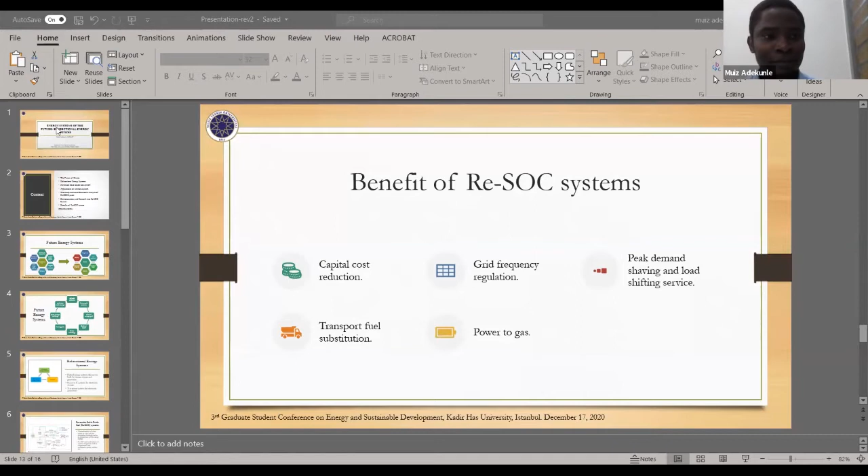Okay, thank you. Sorry, I was on mute. I am Muiz Adekunle Agbaje from the Department of Mechanical Engineering, Yıldız Technical University, Istanbul. I'll be talking on the energy systems of the future, with specific reference to bidirectional energy systems.

In this presentation, I'll be talking on the future of energy. I'll be giving an insight on bidirectional energy systems. I'll be talking on the reversible solid oxide cell system as an example of a bidirectional energy system, the applications of this system, the aspects of the thermodynamic and economic analysis of the reversible solid oxide cell system, some demonstrations that have been made and used, and some research that has been done in terms of reversible solid oxide cell systems, the benefits of the system, and finally, I'll conclude on this discussion.

So when we talk about future energy systems, we are talking about systems that are characterized by so many things that we want as part of our energy in the future, how we want energy to look like in the future, the energy ecosystem, what do we want it to look like. We talk about demand side management, net zero energy systems, renewable energy systems like solar and wind. We talk about increased energy efficiency. We talk about green energy in terms of CO2 emission reduction. We talk of so many things that characterize these systems, and these characteristics will result in systems with high integrity, high security of supply, less expensive systems, and the like.

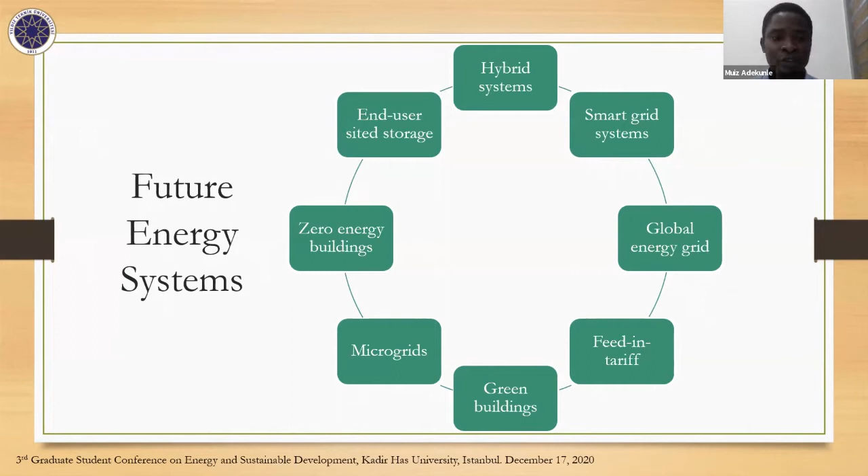Now, talking about hybrid energy systems, an example is the bidirectional energy system that I will be talking about here today. A bidirectional system is a system that serves for both energy storage and energy generation. I should note here that a bidirectional energy system has to be one system that functions both as a storage system and a generation system as a whole, not a storage system that has generation incorporated to it. That is not a bidirectional system.

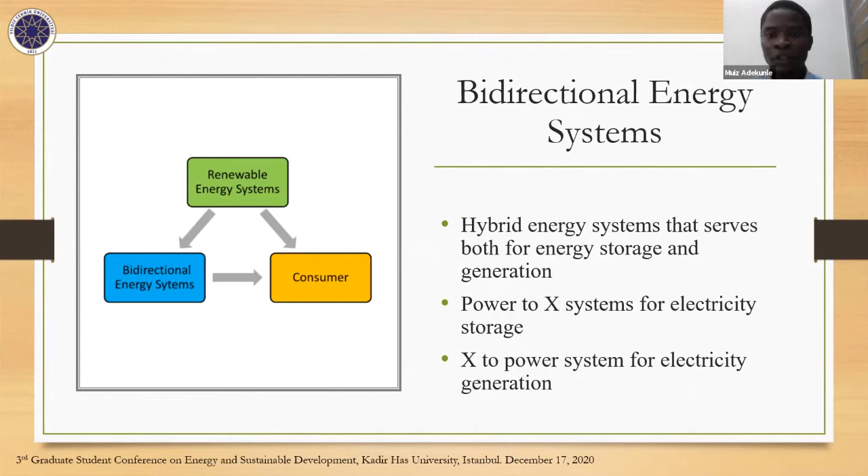So these systems are characterized by power to X or X to power. Here, X could be hydrogen or heat, depending on how the system is configured. An example of this system is the reversible solid oxide cell system that I will be talking about here today. A reversible solid oxide cell system is an electrochemical cell system that functions as a fuel cell for electricity or power generation, and as an electrolyzer cell for energy storage.

This system, being a system, has to contain at least two components. So for the reversible solid oxide cell system, it has other components such as heat exchangers, heaters, compressors, and turbines, depending on how the system is configured and the size of the system. We call these the balance of plant components. They are used to set the temperature and pressure of the gas, the exhaust, and the flow gases in the system, to set the system performance and system characteristics.

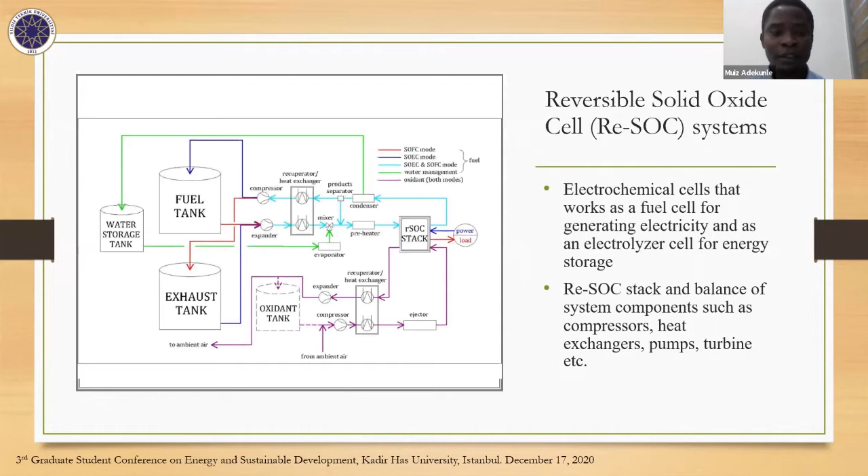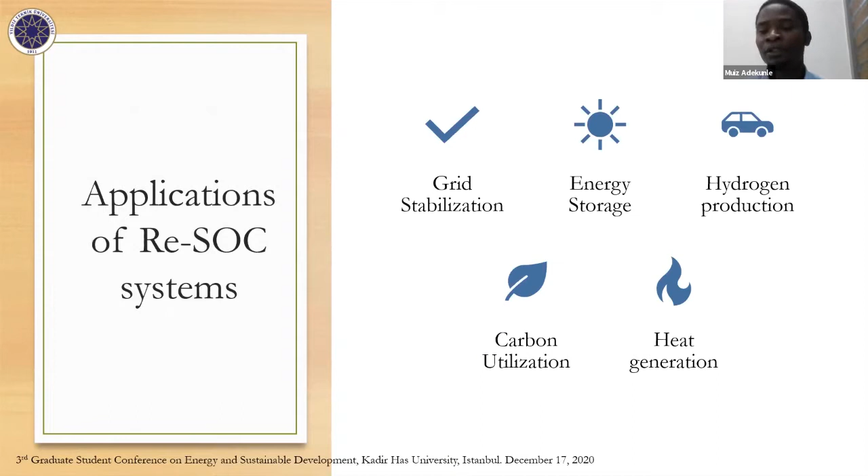So these systems could be applied for grid stabilization. They could be used purely for energy storage. They could be used for hydrogen production when the system works with steam. They could be used for carbon utilization, where they could generate synthetic natural gas, or be used to store electricity in the form of syngas. And also they could be used for heat generation, because reversible solid oxide cell systems, or solid oxide cell systems in general, work at very high temperatures, from above 500 degrees centigrade up to 1000 degrees centigrade. So the aspect of heat generation and thermal management, among others, is important in the system.

So in the aspect of thermodynamic analysis, we talk about the heating value of hydrogen or the synthetic natural gas generated from the system when it is operating in storage mode. We talk about the power generation or heat generation and consumption in the system. We talk about the round trip efficiency of the system, which is the ratio of the power generated to the power stored in the system. We talk about the storage size, which is usually the size of the tank used for storing the fuel, probably the hydrogen or the natural gas, depending on the fuel used in the system.

We talk about the fuel utilization of the system, because it's a system that works on cell stacks, as I'll explain further. So the amount of fuel supplied to the system is not usually the total consumed, just like we have in chemical reactions. So the fuel utilization ratio is actually very important in the thermodynamic analysis of the system.

We talk about the cell degradation rate per cycle. As I said earlier, the reversible solid oxide cell system works at relatively very high temperature, which causes degradation in the cell. So the rate of degradation per cycle is also important in characterizing the cell and the system as a whole, to determine the lifetime, the efficiency, among others.

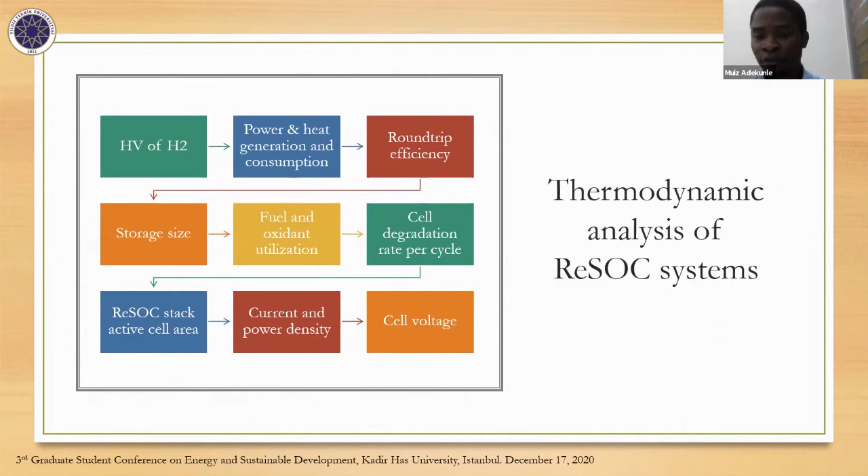Also, the active cell area, the current and power density, which is the ratio of the current or power generated or stored by the system to the active cell area. And of course, we have the cell voltage of each individual cell, which amounts to the total stack voltage in the reversible solid oxide cell system.

In the aspect of economic analysis, we talk of the capital cost associated with the stack of the system, because the other balance of plant components are actually mature technologies, so their prices could be predicted or asked from vendors during the economic analysis. However, the capital cost of the stack is not, there isn't enough data to predict the cost of the stack. So the capital cost of the stack is very important, as it takes a large amount of the total cost of the system.

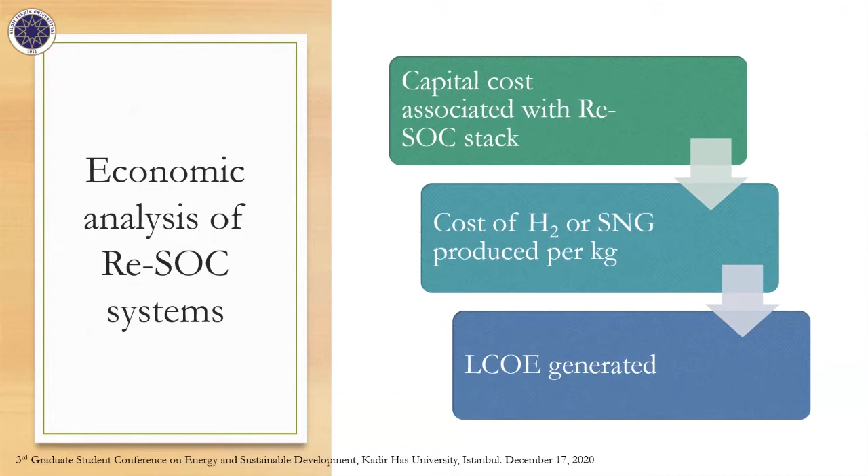The cost of producing hydrogen or synthetic natural gas, depending on the operating fuel of the system. When I talk about operating fuel here, I'm talking of either steam or carbonaceous gases such as carbon dioxide or the like, depending on how we choose to operate the system. The cost of producing these gases is also important in the economic analysis of the system, because we have to achieve a beneficial cost of producing this hydrogen or syngas. Otherwise, no matter how efficient the system is, if the cost of producing this gas is not competitive with what is available in the market, it's just another waste of technology.

Also, the levelized cost of electricity generation. The cost of hydrogen and synthetic natural gas applies during the storage mode of the system, when we talk about hydrogen or synthetic natural gas production. During the generation mode, electricity is generated, and the levelized cost of this electricity is very important. If we do not take cognizance of this cost, and it's not on par with what's available from other systems such as pumped hydroelectricity, it is just as good as not having a system, because nobody would want to pay more for a system, no matter how good or interesting it seems.

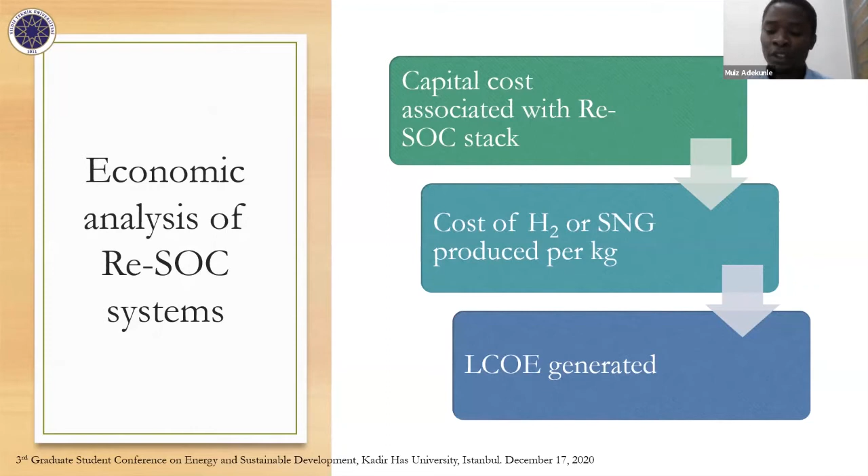So now going to the system as a whole, the demonstrations that have been carried out - we've had experimental demonstrations and, of course, the computational modeling of these systems.

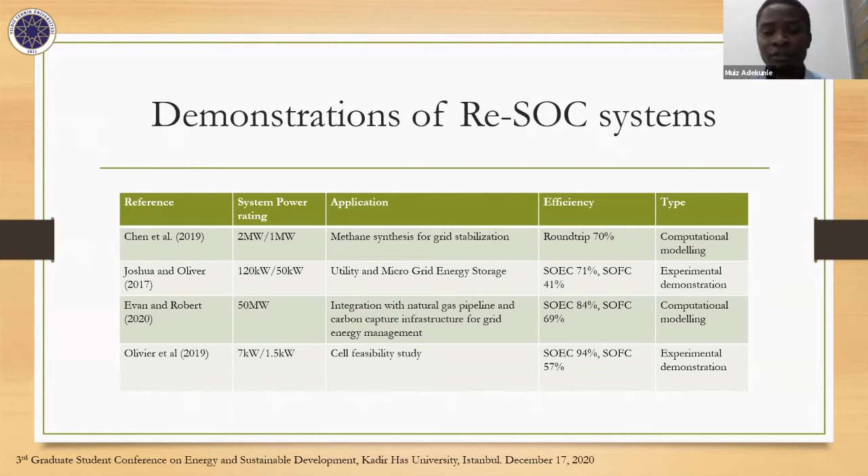Also, this feasibility study was carried out earlier to show the feasibility of operating a fuel cell both as an electrolysis cell and as a fuel cell - practically the reversible operation of the solid oxide cell system and a solid oxide cell stack in this situation. It's a stack, not the whole system, just a stack. A 10-cell stack was tested in this operation, and it showed very good performance both as a fuel cell and as an electrolysis cell.

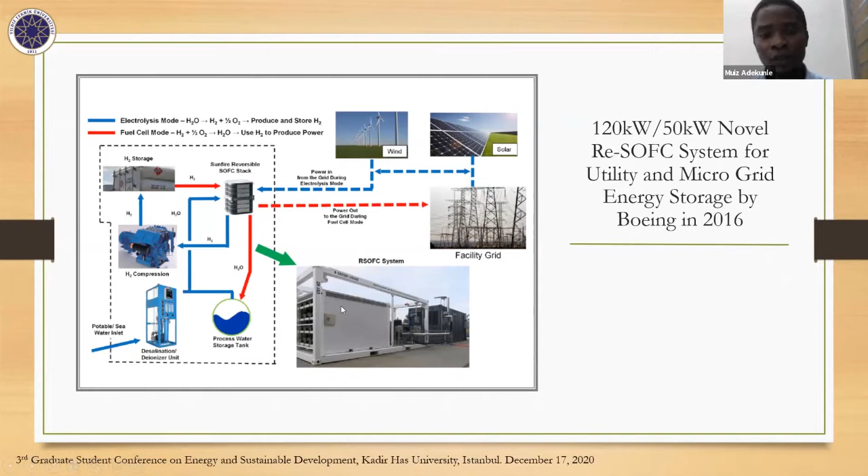As I said earlier, this 120 kilowatt by 50 kilowatt system that was incorporated into a grid is explained here. We have the solid oxide cell stack here, and the electricity was generated from solar, wind, and the grid, and supplied to this stack, which has the hydrogen storage, hydrogen compression system, the desalinizer, and the deionizer unit for the water used, because water was used here to generate hydrogen. This is the whole system, which showed very good efficiency, as I explained earlier.

So, further research for anyone interested - I selected these two studies because they are very detailed in terms of the work that was done. This 2015 study...

Yes, this design was carried out for the engineering design of the reversible solid oxide cell, the performance analysis, and the operating condition selection, among others. This 2015 study and a 2017 study showed the feasibility of this with respect to spot electricity and fuel market for a 2050 target of Denmark. And this 2019 study showed the integration of this solid oxide cell system into the natural gas pipeline of Alberta, Canada.

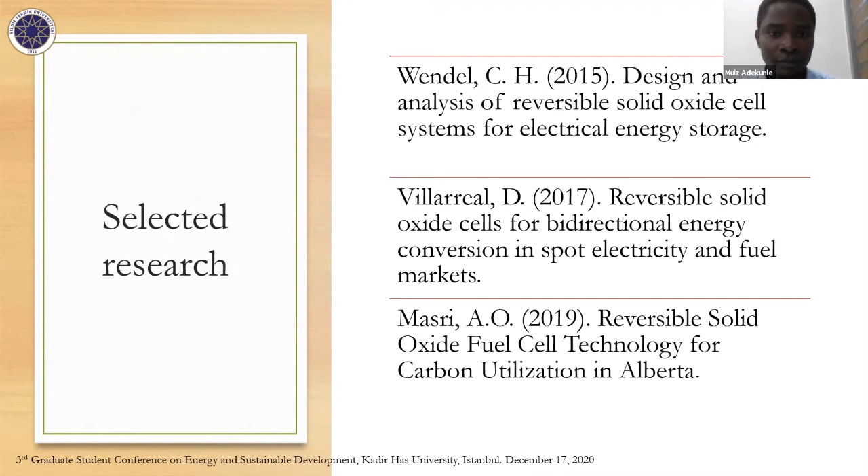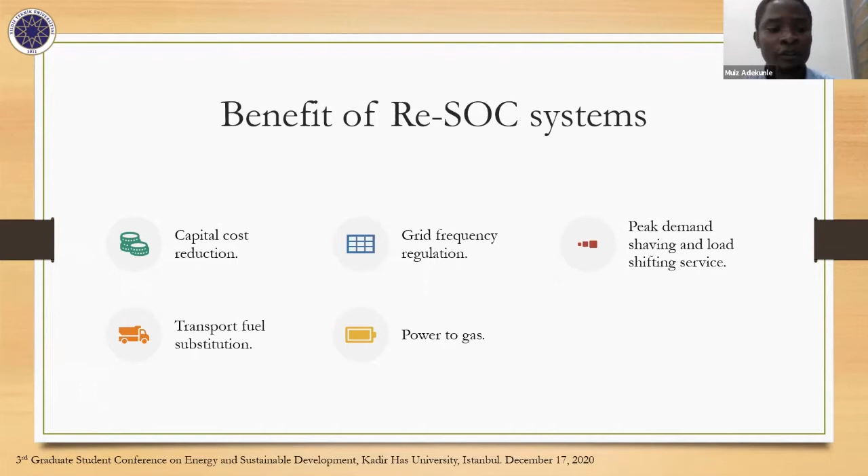The benefit of this system, as I said, is that it's one system that functions as two. So there is up to almost half capital cost reduction, and it can be used for grid frequency regulation, peak demand shaving, and load shifting services. It could also be used to generate hydrogen for transport fuel, and of course, for power-to-gas applications.

This figure is from IRENA in 2018, showing a hydrogen economy. It shows how a reversible solid oxide cell system can be integrated into a hydrogen economy, where electricity is converted to hydrogen and used in different applications, as you can see in the picture.

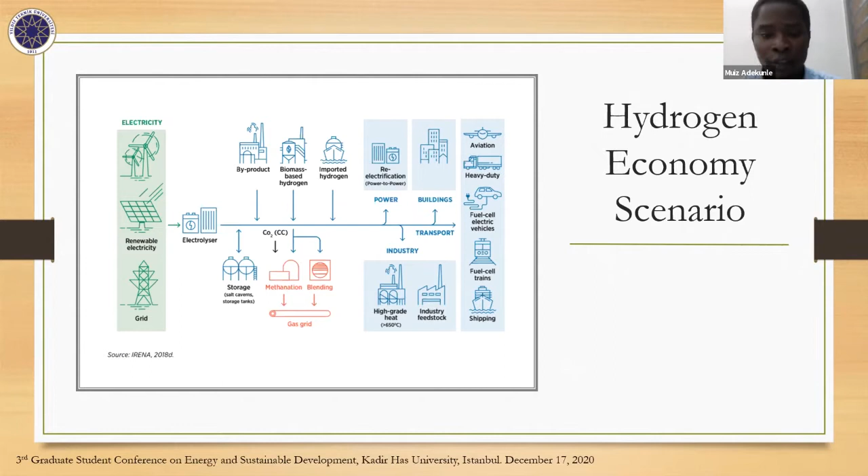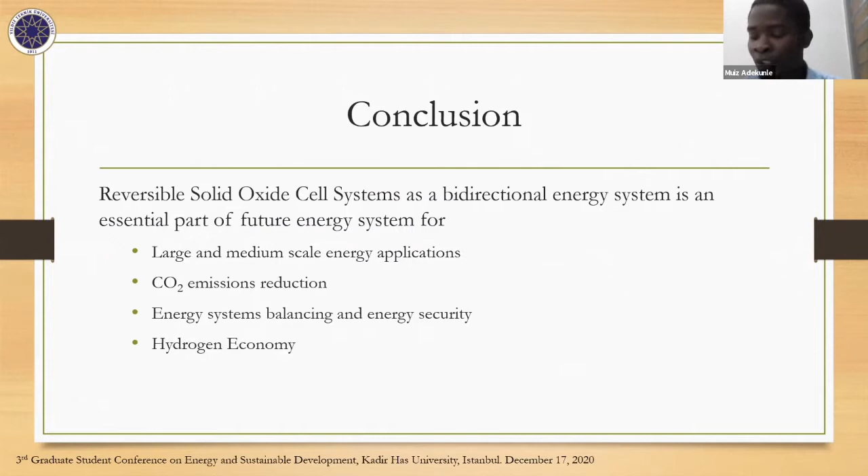In conclusion, I'd like to say that the reversible solid oxide cell system, as a bidirectional energy system, is an essential part of the future energy system for large and medium scale energy applications. It can be used for carbon dioxide emissions reduction, for energy system balancing and energy security, and also in a hydrogen economy. Thank you for listening.

Any burning questions, if there are? No? Well, I can ask one if you want.

Muiz, so what is this, your master thesis? Yes. And how will it progress? Will you have a small experimental setup, or will you do some simulations, or is it just, for the moment, a literature survey? Due to cost restrictions, I will just be doing a simulation. Actually, I have the system that I've already designed and simulated. I have it already, so I'm presently carrying out economic analysis on the system.

So it will be essentially a kind of simulation. Yes. Okay, any other questions? Muiz, let me ask this: have you made any search about the capital cost of building this structure and the operational cost? Because that is also important, you know.

Yes, of course. In terms of capital cost, for the reversible solid oxide cell system, I am presently using the cost of the solid oxide fuel cell, because we believe it is the same fuel cell that will be used as an electrolysis cell, so the same cost analysis goes. We have historical cost data for solid oxide fuel cell systems, just the fuel cell stack, so that is what I'm using to simulate the cost of the cell stack.

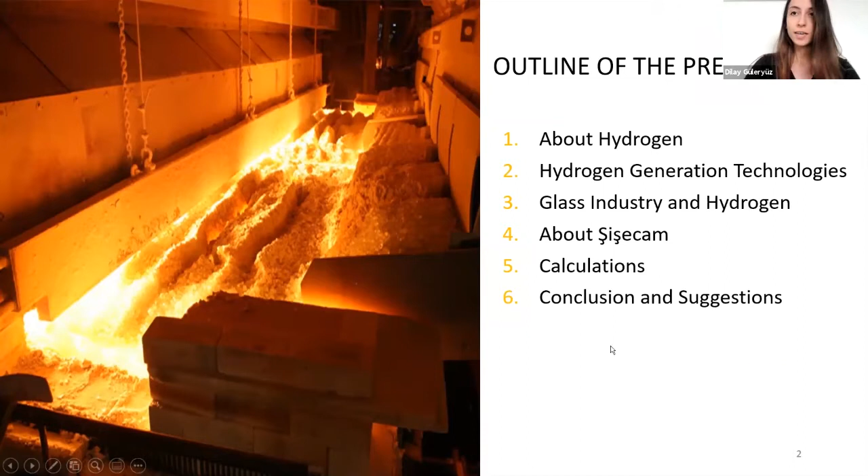So here's the outline of the presentation. We will first talk a bit about hydrogen and hydrogen generation technologies, and then a brief introduction to the connection between glass industry and hydrogen will be made. This will bring us to the biggest glass manufacturer of Turkey, Şişecam. Lastly, I will present the analysis and findings of green hydrogen generation potential for several Şişecam plants in Turkey. And then we will shortly conclude all of them.

Now let's start. We do know hydrogen. It's in water, it's in organic substances, it's basically everywhere. And in fact, hydrogen may be the most abundant substance in the universe. Realizing its potential, Jules Verne once referred to water and hydrogen as the future coal in one of his books.

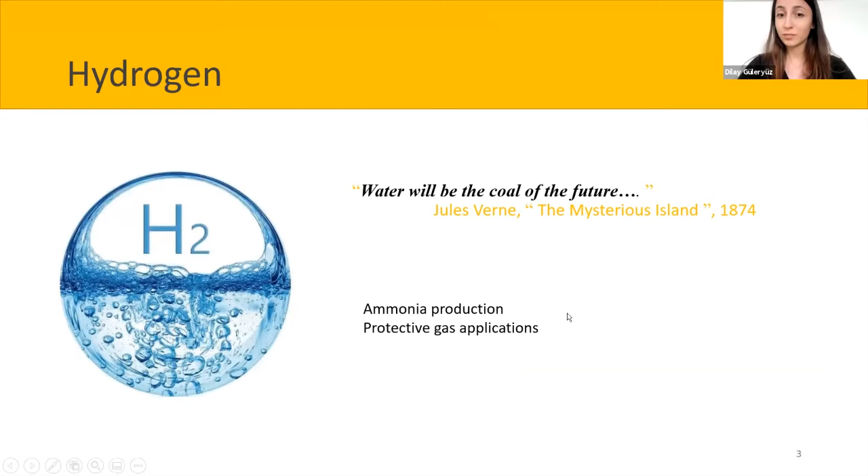So if there's that much amount of hydrogen, we should be using it somewhere in the industry. In fact, hydrogen has a wide range of applications, from ammonia production, protective gas applications, and energy applications, to decarbonizing carbon-intensive industries such as iron and steel, cement, or glass. In this presentation, we are interested in this kind of application of hydrogen.

So in order to decrease carbon dioxide emissions and start a transition to green hydrogen, hydrogen-intensive industries may be a good start, and as being said, glass industry is one of them. So in order to understand how to decarbonize a sector by hydrogen, let us first cover hydrogen generation technologies.

These techniques can be divided into three by using a simple color code and based on their carbon dioxide emissions. Firstly, gray hydrogen. Gray hydrogen refers to hydrogen generation from fossil fuels. Oil, coal, or commonly natural gas can be used as the source in this kind of application. The costs are low, and in fact it's the cheapest way to produce hydrogen. However, carbon dioxide emissions are very high.

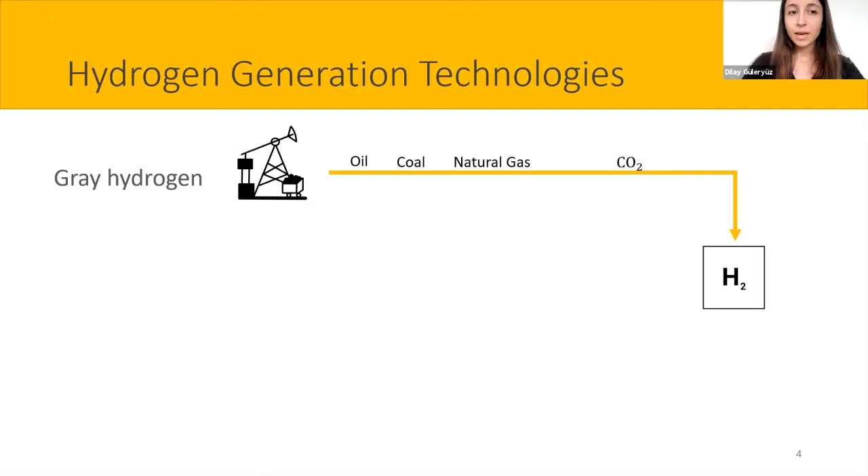The second one is blue hydrogen. Blue hydrogen is an interesting concept. Here again, fossil fuels are used as the source, but a carbon capture and storage technology is implemented into the system to reduce the carbon dioxide emissions. This technique is not very popular considering the costs of carbon capture and storage technologies and the taxes.

And lastly, green hydrogen comes, and in these applications, decarbonized electricity is fed into a water electrolyzer to produce hydrogen. The decarbonized electricity comes from renewable sources, such as wind, solar, or hydroelectricity, or other renewable sources you can imagine. The costs of using renewable sources decrease every day by developing technologies, and therefore water electrolyzers are gaining more attention. The electrolyzers can be alkaline or polymer electrolyte membrane, namely PEM electrolyzers.

PEM electrolyzers are quicker to respond to changing electricity. Therefore, they are preferable with renewable energy sources. However, their costs are higher than alkaline electrolyzers.

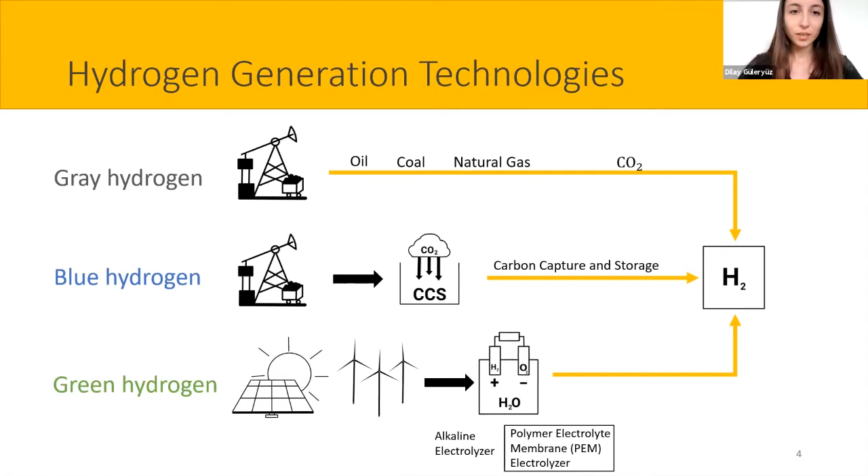Now we will briefly talk about the role of hydrogen in the glass industry. Hydrogen is employed in flat glass production, and here you see a production line of float glass. The raw mixture consisting of quartz sand, dolomites, soda, and lime is melted and floated into a tin bath. And in the tin bath, the glass takes its flat and flawless form.

The atmosphere of the tin bath is very important here, because any oxygen that may leak into the mixture can create flaws, and it's really unwanted in flat glass. That's why the tin bath's atmosphere is filled with 10% hydrogen and 90% nitrogen, creating an inert atmosphere. After that, the mixture is left to cool down and cut into sheets to take its final form.

Today, float glass manufacturers use about 86 normal meter cube hydrogen and 765 normal meter cube per hour of nitrogen. The numbers are very high on an annual basis, so this makes the glass industry a very good candidate for transition to green hydrogen.

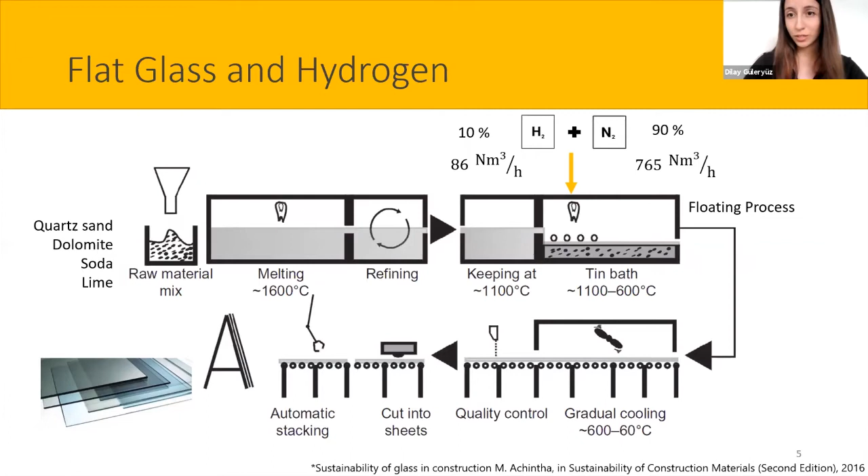Now that we know the connection between hydrogen and float glass, we can talk about the situation in Turkey. The production capacity of the Turkish glass industry is about 3.5 million tons per year, and Turkey's biggest glass manufacturer is Şişecam. The company is also the 5th biggest flat glass producer in Europe. We are interested in this presentation for the flat glass.

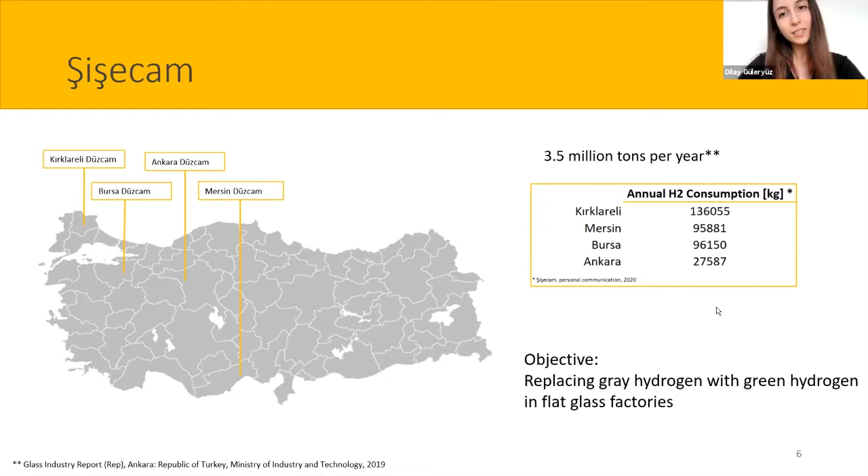A TRNSYS analysis is performed for each location on an annual basis. The hourly weather data for each location is collected and employed in the simulations. Therefore, the simulations are made for 8,760 hours to account for 1 year. The calculations are based on the given assumptions.

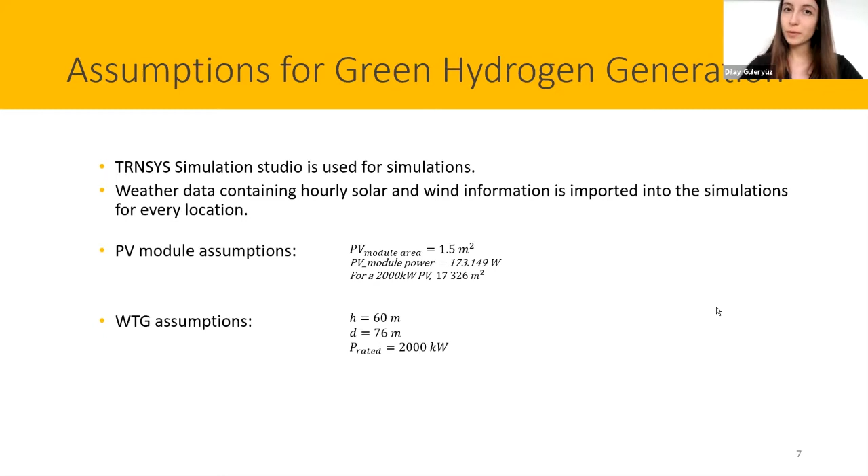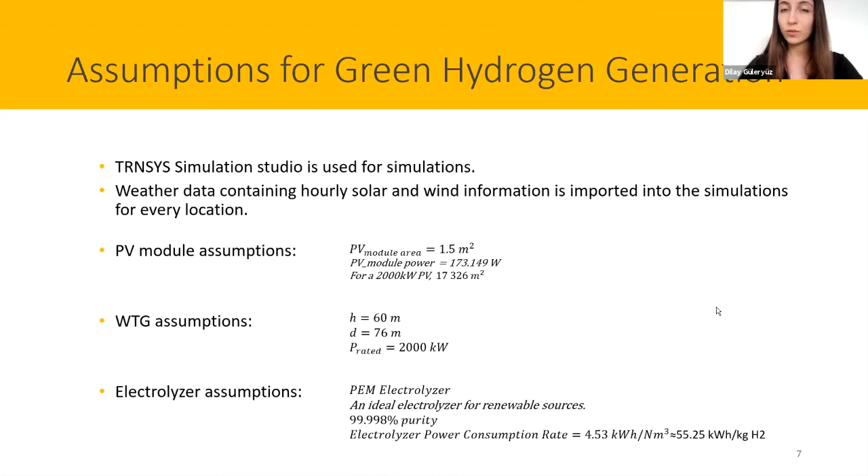The installed capacity of PV modules and wind turbines are fixed to 2 megawatts because of homogeneity in the calculations, to make it easier to compare between photovoltaic panels and wind turbines to decide which one is better. The electrolyzer used in the simulations is a PEM electrolyzer, chosen for its suitability to the intermittent nature of renewable sources. The electrolyzer has 55.25 kilowatt hour per kilogram of hydrogen power consumption.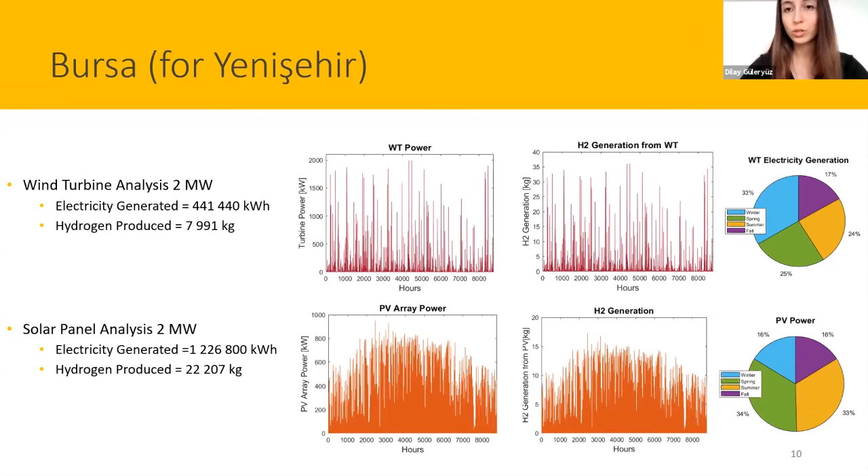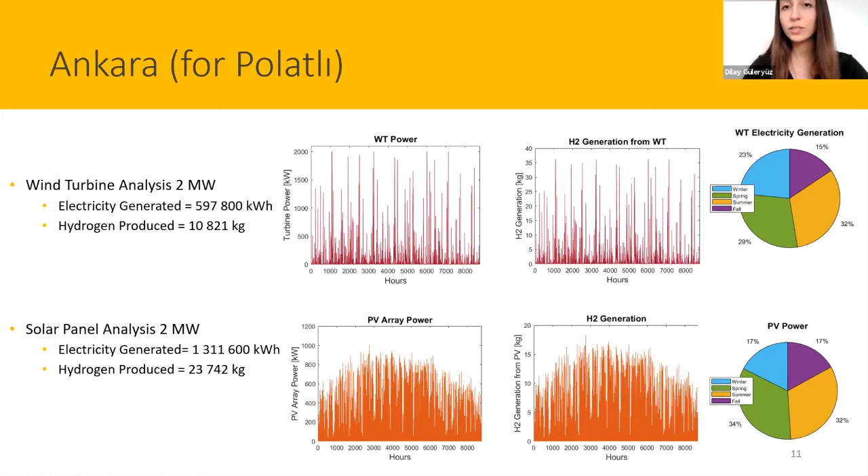The demand can be generated by using 4 wind turbines or a relatively small PV area. Coming to Bursa, geographic restrictions make it perform weaker than other plants. However, the relatively small hydrogen demand in the Bursa plant can be met with a reasonable PV area.

Lastly, Ankara has the lowest hydrogen consumption, so its demand can be met with a very small PV area or by using 3 wind turbines. As final results, it's not impossible to switch to green hydrogen in these locations for the flat glass industry, and further cost analysis would provide better insight for investments.

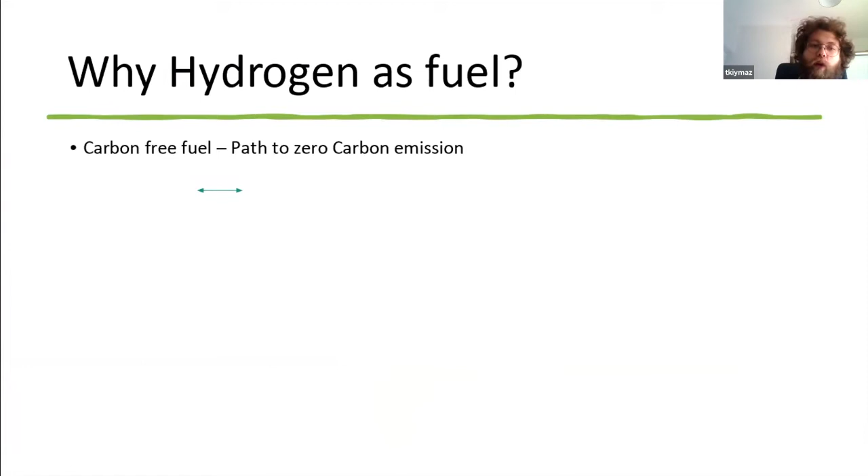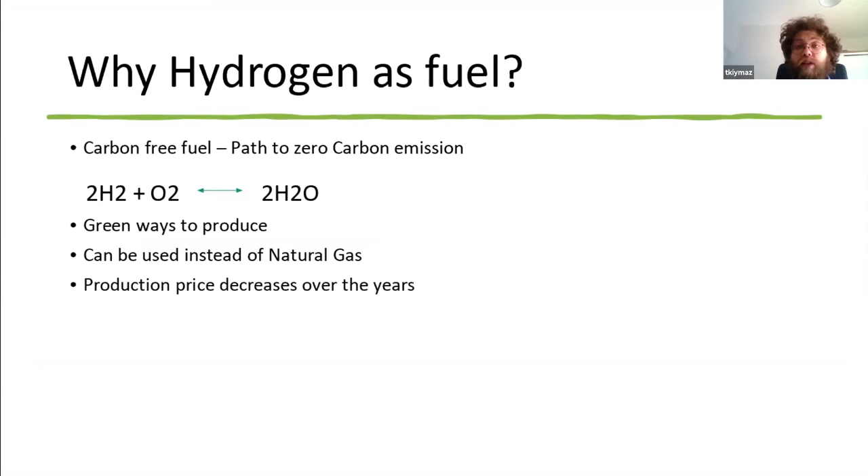So why do we want to use hydrogen as fuel? Because it's a carbon-free fuel, and it's really important to our path to zero carbon emission. Here you can see the global mechanism for hydrogen oxidation, or as we know it, combustion. In the global mechanism, we can see that the only product is H2O, which we know as water. As Dilay said in the previous presentation, there are green ways to produce hydrogen, which is good, and hydrogen can be used instead of natural gas applications, which is really important for us since we are mostly using natural gas for applications as fuel. The production price of hydrogen is decreasing over the years, which is great for the future.

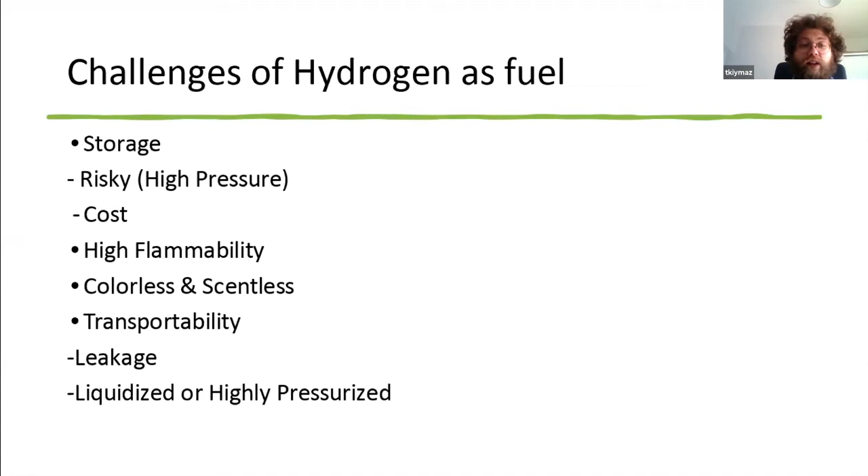So why aren't we using hydrogen right now? Why don't we want to use it? Because there are a lot of challenges with hydrogen. I can start with storage. It's really risky to store hydrogen because of its lightweight nature. It should be really pressurized if you want to store it as a gas, or we need to liquefy it, but that's really costly. Also, hydrogen has high flammability. It's colorless and scentless, so any leakage is a problem, and the transportability of hydrogen is also an issue because of its properties. We need to make new pipelines, and leakage is really a problem because of the lightweight of hydrogen.

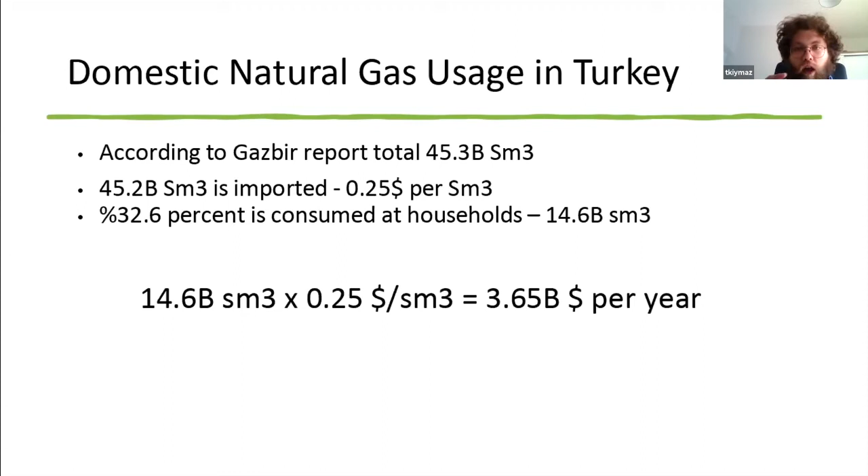So before I continue, for now I talked about hydrogen, but we are using natural gas worldwide and also in Turkey as fuel. I would like to give you some numbers about natural gas. According to the Gazbir report, a total of 45.3 billion standard cubic meters of natural gas was consumed in Turkey in 2019. Nearly all of it is imported from foreign countries at a price of 0.25 dollars per standard cubic meter. 32.6% of this natural gas is consumed in our households, which corresponds to 14.6 billion standard cubic meters. Why did I give you these numbers? Because it costs us $3.65 billion per year just for our usage of natural gas in our homes. So we use this natural gas in our cooktop burners while cooking our meals, for water heaters, for central heating in our homes, and in gas-fired ovens, usually used in restaurants and also in some of our homes.

But how, as I mentioned, we want to use hydrogen for fuel, but how can we use hydrogen in our house? Can we get a bottle of hydrogen or pressurized tanks in our kitchens? No, we don't want that. But how can we use hydrogen?

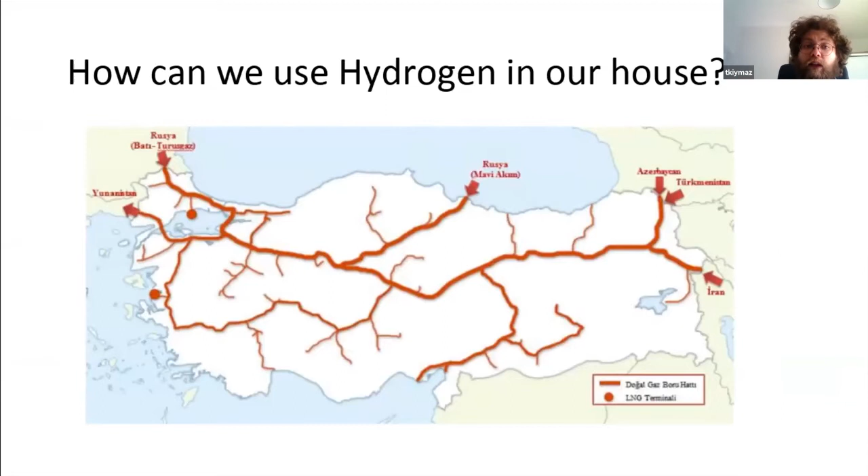Actually, we can use hydrogen with the existing natural gas pipelines by blending some part of the hydrogen into natural gas pipelines. This technique is great as a starting point on the way to 100% hydrogen usage in the world. And because we are using the existing infrastructure, we don't need to build any other system, which saves cost.

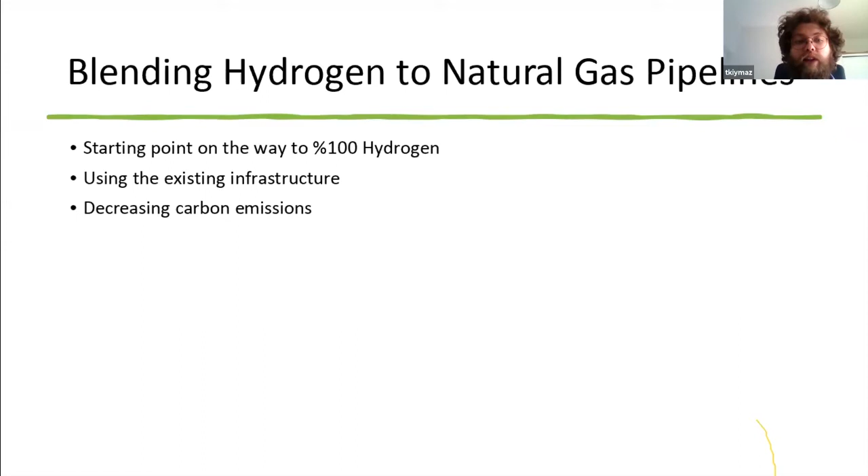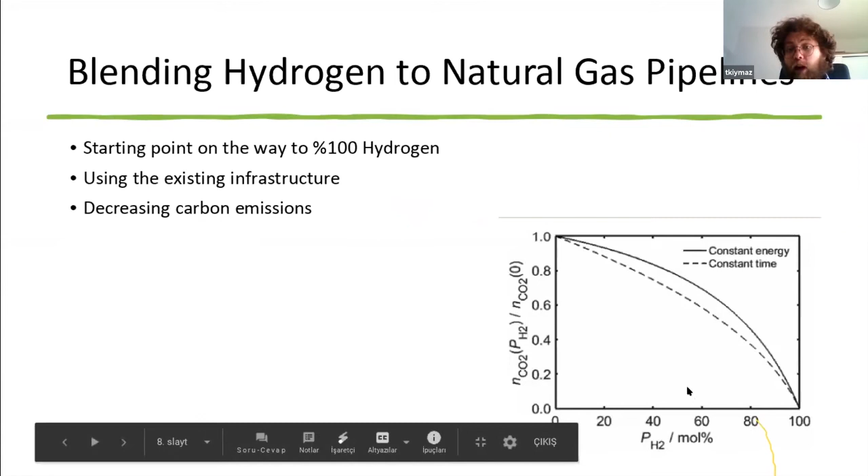While using the hydrogen blend, we can decrease carbon emissions, which is really important, as I said. In this figure, you can see that with the addition of hydrogen, the carbon dioxide emissions decrease nearly linearly. So can we do that really?

Can we blend some hydrogen into our natural gas pipelines without any problems or errors? Actually, we can, but only up to a certain point.

Here's an example for you. This is the HyDeploy project going on at Keele University in the United Kingdom. They are trying to use up to 20% hydrogen blend in their natural gas pipelines, testing it on their campus. For now, there are no problems. The project has been going on for about 10 months, and they've reached 15% hydrogen blend with no problems so far.

After 8 more months, if the project finishes with no problems, they will start using hydrogen blend in the city where Keele University is located. This project is funded with about 7 million sterling.

So before I continue with the limitations of hydrogen blending, which I talked about, I would like to briefly inform you about burners and flame structure.

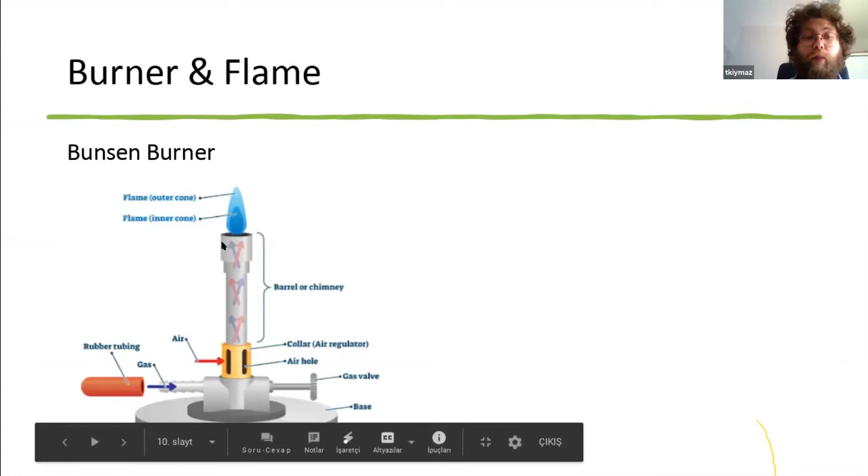Here's a Bunsen burner. I think all of you have heard of or seen it in chemistry classes or somewhere in your life. The gas comes from this pipe and mixes with the air inside the burner, and after that, with the help of an ignition source, a flame occurs.

When we look closer at the flame, we can see a flame front. You can visualize it like this: when you light a candle or a lighter, you see an orange structure of the flame, a cone-like shape — that's the flame front. The unburned gases coming from the burner are ignited there.

After that, the flame front is stabilized, and the flame front can be said to be where the reaction happens. The flame has a speed which wants to propagate into the unburned gases, and the unburned gases have a speed that wants to lift up the flame, and the flame somehow stabilizes into this cone shape.

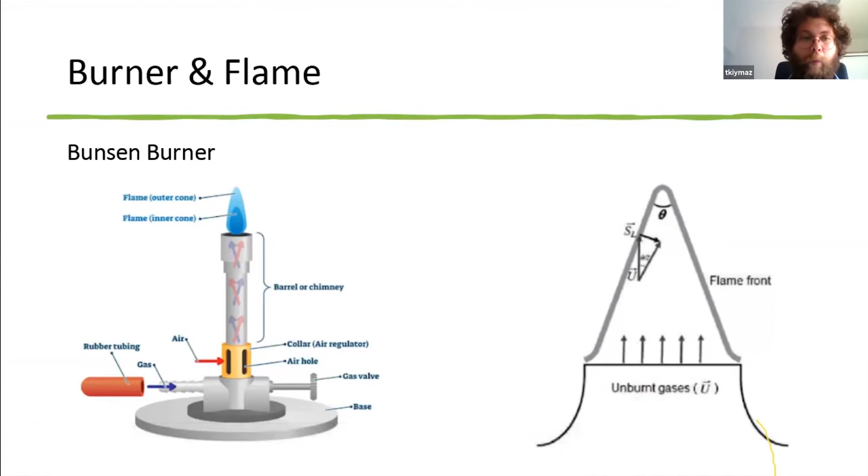So I would like to continue with hydrogen enrichment in these burners. Before I go over that, I would like to say that there is not sufficient information and literature about domestic applications, which is our topic right now.

The safe limits should be investigated for the blending in a close-up view. Because the properties of the mixture change with hydrogen concentration, we need to determine these limits carefully and which property is changing. The flammability limit of hydrogen is wider than natural gas, so the mixture's flammability limit will change. And since hydrogen has lower ignition energy, it can be ignited much more easily — this is one of our main concerns.

The temperature will increase with hydrogen addition, since the flame temperature of hydrogen is much higher than natural gas, and the flame structure also changes with hydrogen addition. Lastly, there's a phenomena called flashback, which is really important when determining the limits of hydrogen enrichment in burners.

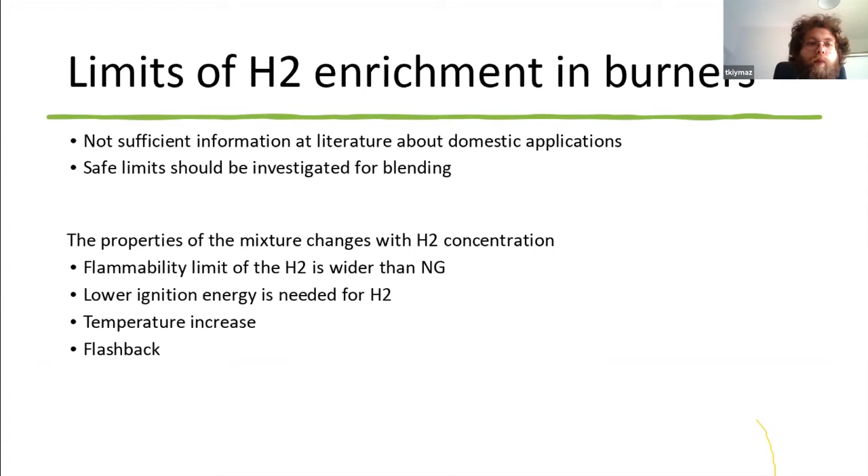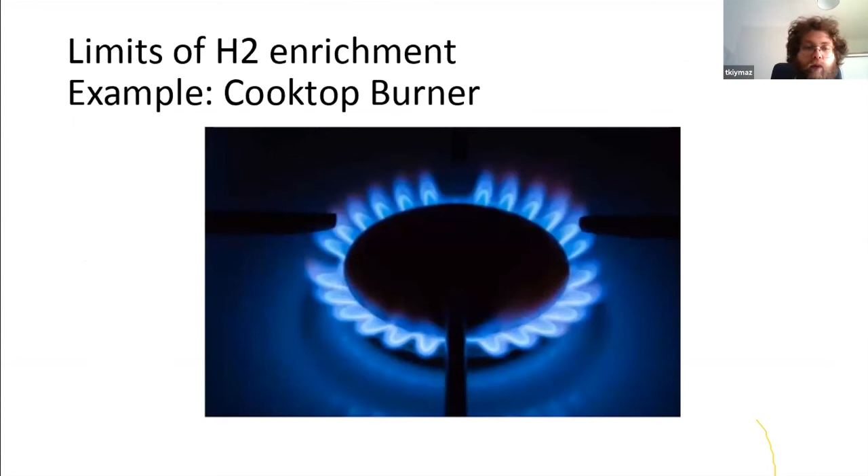From now on, I would like to continue my presentation with one example that we all use in our homes: a cooktop burner. I will show you some experimental results from the Zhao et al. paper, which is the most recent and valid paper about this topic.

First, I would like to start with the ignition time. The ignition time of our cooktop burners should be within 4 seconds for safety reasons, and this time decreases with hydrogen addition. As you can see from the figure, with the addition of hydrogen, the ignition time decreases up to 20% hydrogen addition by volume, and it's okay — it's good for the safety limit.

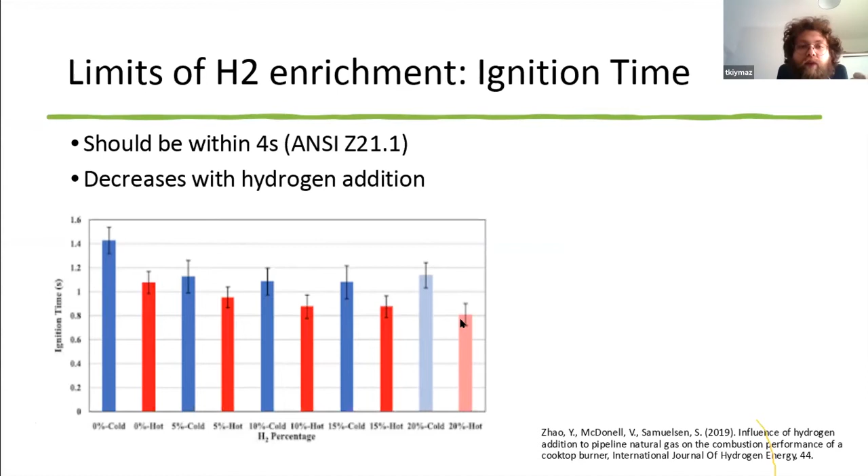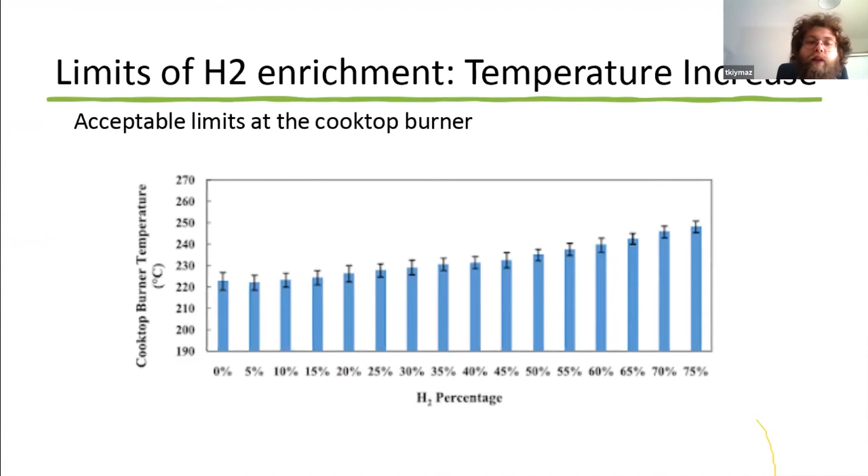Let me continue with the temperature increase. As you can see from the figure, with the addition of hydrogen percentage, the cooktop burner temperature increases. But with the addition of 75% hydrogen, which is great, there's only about a 10% burner temperature increase, which is accepted as an acceptable limit for these burners.

But how about the flashback? As I told you before, the flashback is really important phenomena for these applications, since the hydrogen property is much different than the natural gas while burning. So I can show you flashback as in the left figure. It's a stabilized flame cone that we all know.

And in the right figure, the flame starts to propagate inside the tube. This happens when the laminar flame speed at the direction of the unburned gases is greater than the gases. So the flame front wants to go inside to the tube. And when it starts, it's really problematic because the flame goes into the tube and the flame extinguishes, or it can lead to big detonation problems. So we don't want that.

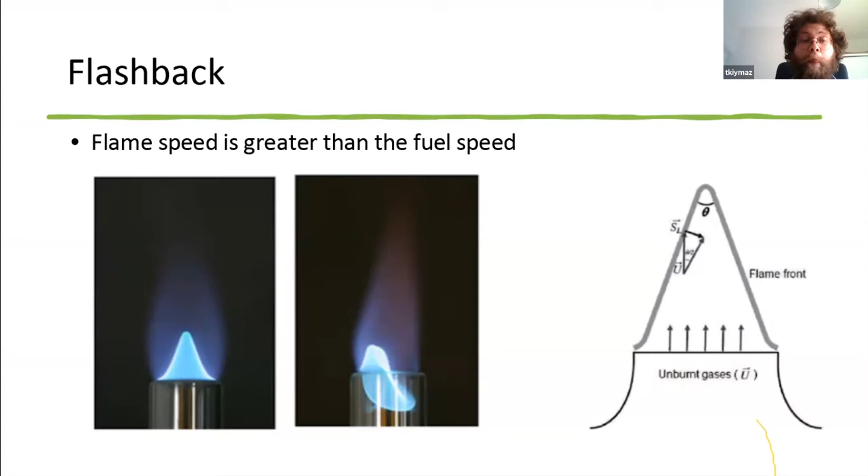We need to investigate flashback deeply in our studies. So here's a picture from Samuels et al.'s work. They investigated the flashback at the cooktop burner, and they found that 20% hydrogen addition by volume results in flashback at the ignition instance. In the last pictures I showed you 75% hydrogen addition, but now I'm talking about ignition, and this should be our safe limit, because after 20% the flashback happens, and we don't want it. So in the figure you can see that at 0.14 second, the flame front occurs, and after that the flame starts to propagate inside the pipeline, as you can see in the figure. And in the last figure, there is no flame at all.

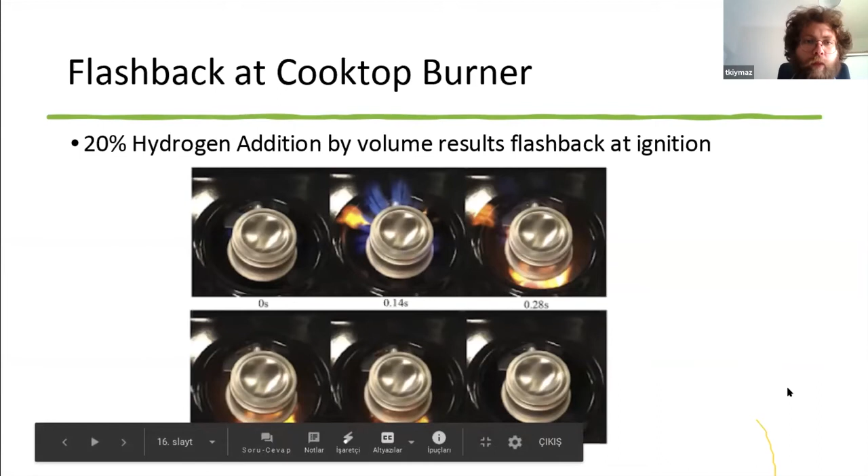So what are we doing at Middle East Technical University? I would like to mention a little bit about that. For now, we calculated the laminar speed of methane-air mixtures at different equivalence ratios and also at different pressures and temperatures. Now we are doing numerical modeling for a simple Bunsen burner case, and we are starting to build our experimental setup in the coming days.

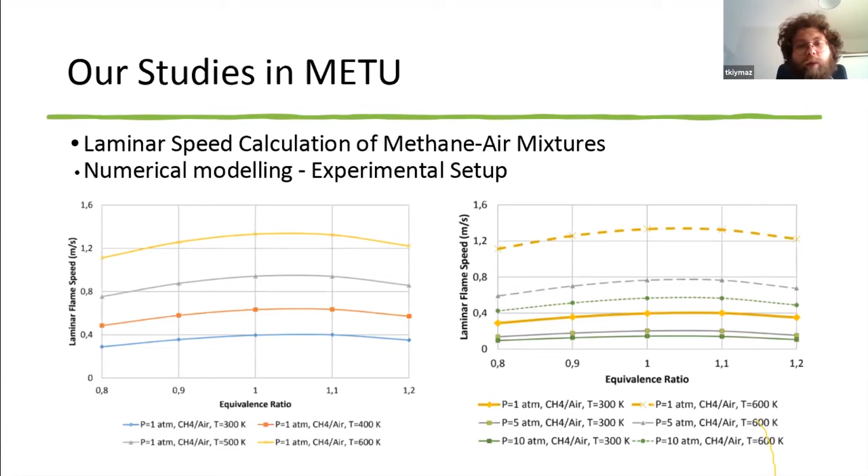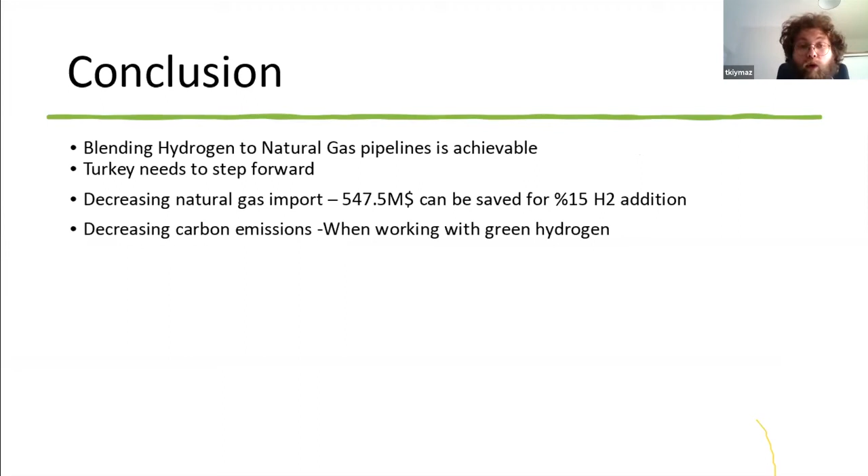So as a conclusion, blending hydrogen into natural gas pipelines can be achievable, and we saw some examples of it. And Turkey needs to step forward for this technology before it's too late. And why? Because we can decrease natural gas imports. Just imagine 15% hydrogen addition—I gave you some numbers, and when you calculate that, $547.5 million can be saved each year in gas imports. And also, another important aspect, we can decrease carbon emissions. However, for that, we need to work with green hydrogen.

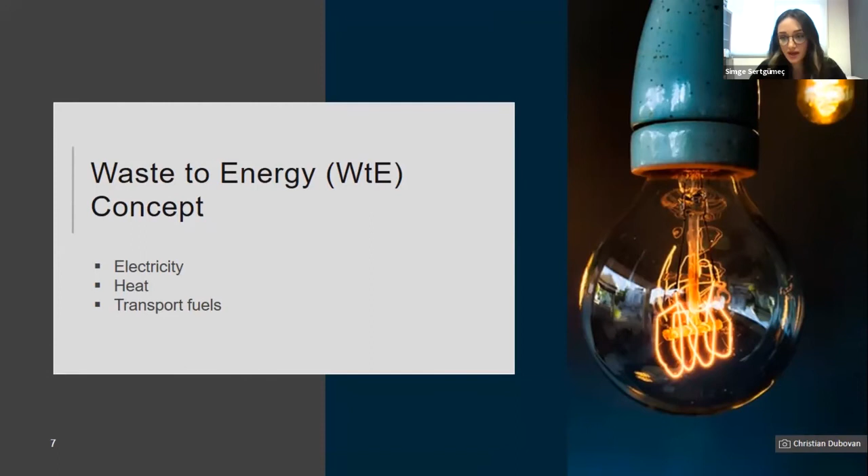At this point, we should talk about waste management, but we are focusing on integrated solid waste management all around the world. One of them is the waste-to-energy concept, and we can convert wastes into new forms like electricity, heat, and transport fuels. For example, transport fuels like diesel.

As I said before, we have a really wide range of wastes, and we can give some examples as solid ones, liquid ones, and gaseous ones to apply these waste-to-energy technologies. For the solid ones, we can give the example of thickened sludge from treatment plants and municipal solid wastes. Also, we have domestic sewage as wastewater in the liquid phase, and refinery gases as the gaseous phase.

So it is a really important point in municipal solid wastes, because in the literature we are seeing you can apply these waste-to-energy concepts to municipal solid wastes easily. I mean, they are really suitable for this.

So how can we do these processes? Basically, we can do incineration, anaerobic digestion, and co-digestion processes. In the incineration processes, we are incinerating the wastes and creating electricity, energy, and waste heat. In anaerobic digestion, we are taking wastes and putting them into reactors, creating an environment that has no oxygen.

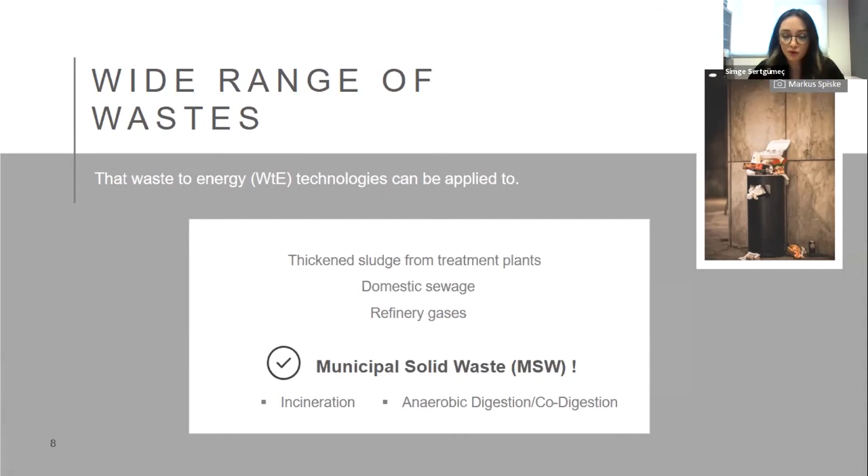We are also putting microorganisms in the reactors that can change these wastes into biogas form. It is an important point because we are gaining methane from the biogas and changing this biogas into electric form. So let's talk about incineration plants.

Worldwide, we can give so many examples from Japan, for example, and from Europe. We have lots of countries from Europe that are applying this incineration plant technology to their wastes.

And what about in our country? Of course, we don't have right now a municipal solid waste incineration plant, but we are constructing one. Of course, we have lots of incineration plants, but basically we are incinerating with these plants generally hazardous wastes, hospital wastes like this. But that facility will be the first waste incineration and power generation facility for our country.

It is now located in Kemerburgaz, and after it starts to incinerate wastes, it will be Europe's largest domestic waste incineration plant. We have a really high amount of waste coming through, and the capacity is 3,000 tons per day, which is a really high number. So, of course, we are generating electricity.

For example, for power, we are creating 78 megawatts of electricity with this facility. We are going to actually produce this electricity, and that number means that 1,500,000 people can supply electricity for their domestic electric usage, which is really nice. But of course, we are creating electricity with this incineration plant.

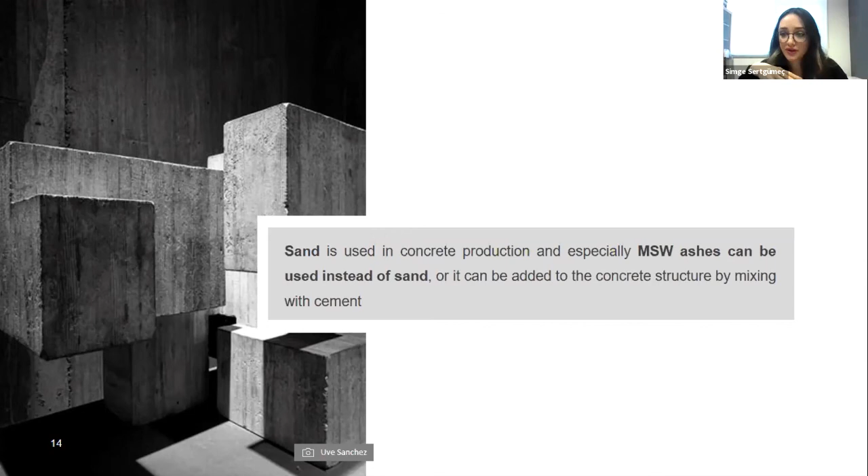Normally, in the production of concrete, we use sand, but instead of sand, we can use municipal solid waste ashes. This is stated in the literature. In this way, we can cause less harm to nature, and we can adopt a circular economic model and zero-waste approach.

In Turkey, right now, as we know, for the last 2 years we haven't had that much construction because the sector was a little bit bad. But the use of concrete in the construction sector in our country is quite common, and especially in 2017 we had a rapid increase in ready-mixed concrete production. The amount was really high, like 115 million cubic meters. And as we all know, with concrete production we are releasing so many carbon dioxide emissions to the atmosphere, causing environmental damage by contributing to climate change. Also, energy consumption in this sector is really high.

So our final statement in this study is: if we use these fly ashes and bottom ashes coming from municipal solid waste incineration plants, after the stabilization step, we can use them as raw material in the construction sector. That's why we support this idea so much in the circular economic model.

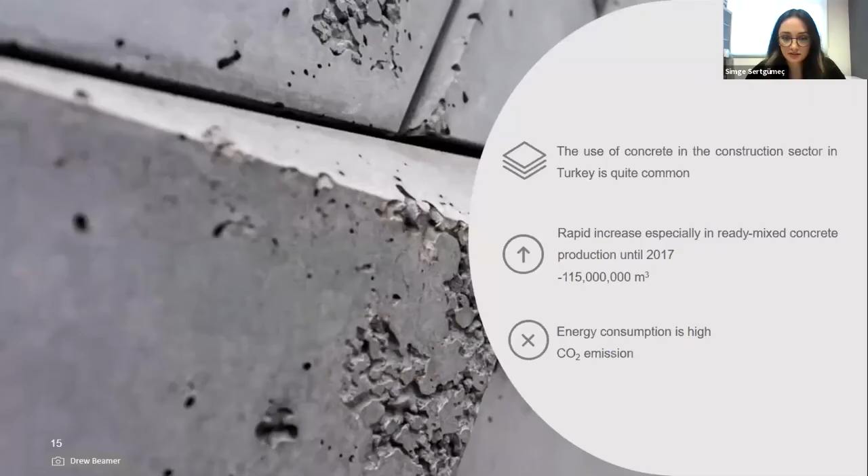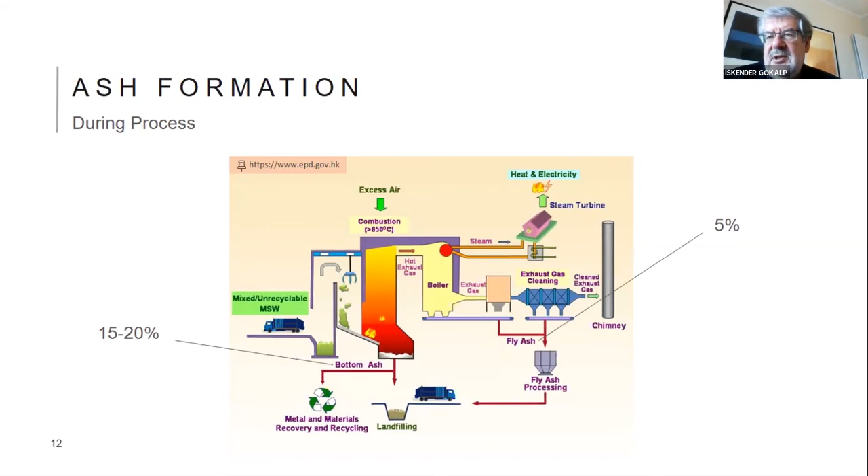Yeah, this problem is kind of specific to coal. In general coal, some places, indeed for Yatağan coal etc., there is some radioactivity, but I don't think municipal waste carries any radioactivity - it carries other bad things. As a matter of fact, coal does not have very much radioactive minerals in it, but clay has a lot, because particles smaller than 5 micron, and clay is associated with coal deposits in most cases. So clay is the sedimentary rock which has the highest amount of radioactives in it.

So the municipal waste is expected to have less radioactivity than coal, probably. Yes.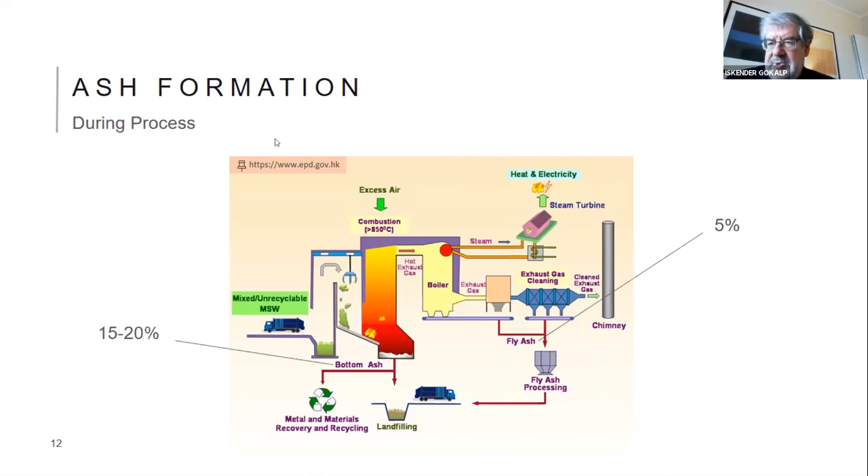Simge, thank you very much. Nice presentation. You are welcome. Yeah, Ahmet Hoca, perhaps you continue. I mean, you ask every question, but I think right now it's okay. Thank you, Simge. Maybe we can proceed to the next one.

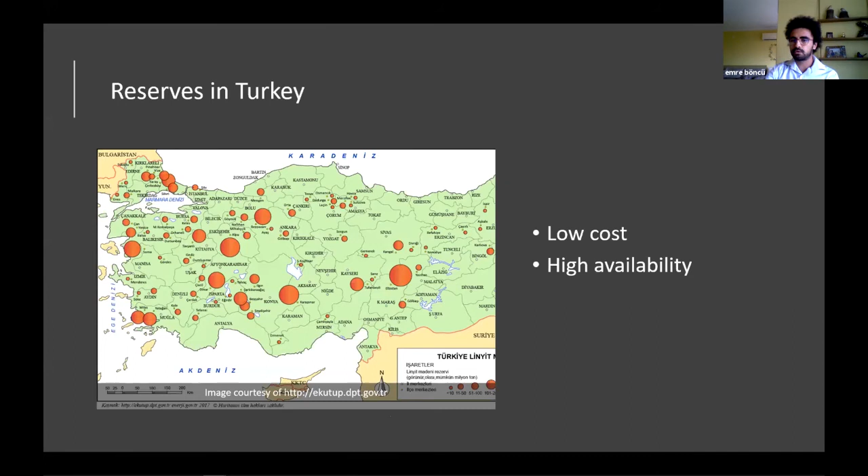Due to its relatively low cost, lignite, also known as low-rank coal or brown coal, has a vital position in the energy mixes of numerous countries worldwide. In Turkey, the use of lignite in the energy mix is 10.5% of total energy generation in 2020. As we can see in the figure, lignite coal reserves are plentiful and spread more or less uniformly throughout Turkey. Total usable amount of lignite coal reserves in Turkey is 15 billion tons. However, power plants using lignite as fuel have some unfavorable characteristics and limitations on performance, mainly due to the very high water concentration of this type of coal.

In addition, lignites also have high ash content. For example, according to the paper on economical characteristics of coals in the Soma-Deniş region, the moisture content of lignite found in the region is between 12 and 21%, and the average ash content of the coal is 34%. Furthermore, lignite coal has the highest sulfur content and lowest calorific value compared to other coal types.

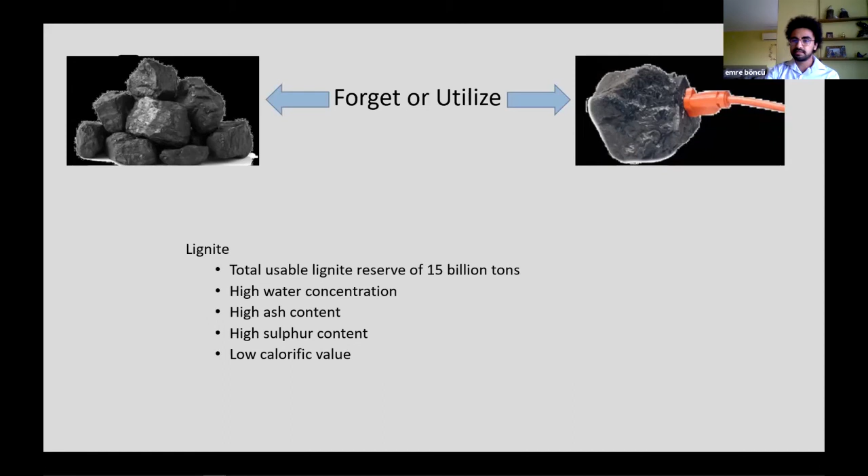However, this does not make it impossible to use lignite coals in energy production. This brings us to syngas. Syngas, or synthesis gas, is a fuel gas mixture consisting primarily of hydrogen, carbon monoxide, and very often some carbon dioxide. Syngas is usually a product of coal gasification, and the main application is electricity generation. Syngas is combustible and can be used as a fuel. Historically, syngas has been used as a replacement for gasoline when the gasoline supply has been limited.

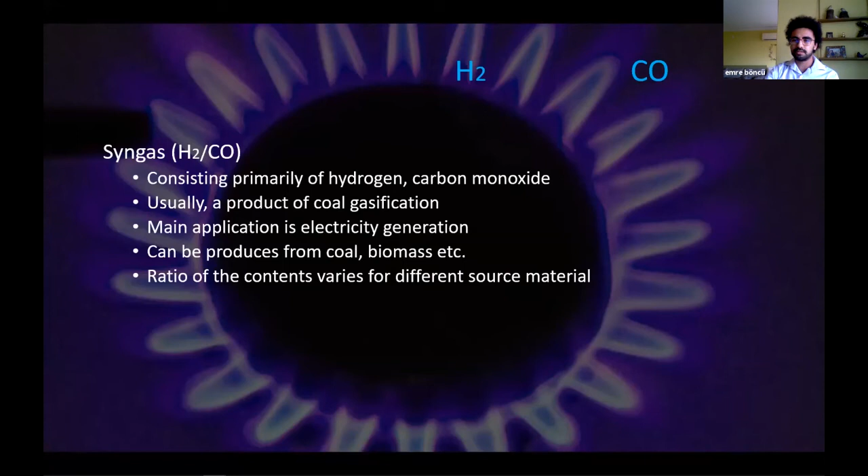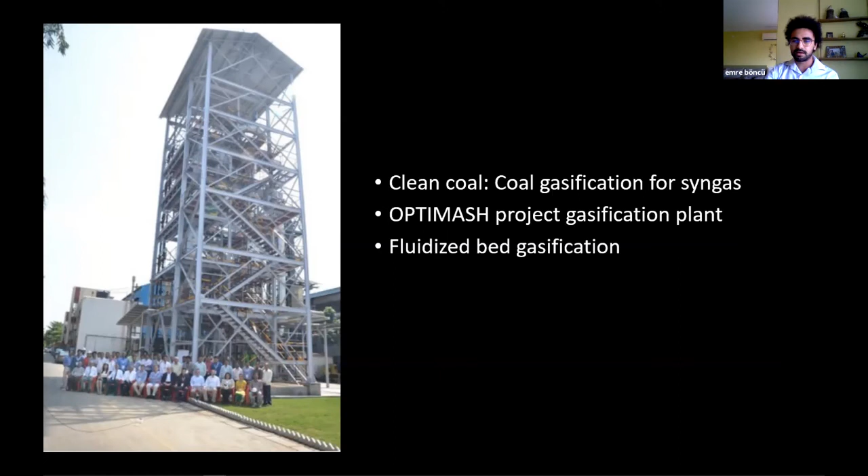With a previous project, it was proven that the most suitable gasification technology is fluidized bed gasification. Additionally, with the EU OPTIMASH project with several European partners, including Türkiye Kömür İşletmeleri, one such gasification plant suitable for Turkish and Indian coals has been designed, built, and is operational today in India. This gasification plant works under 10 bars of pressure and has a power of 1 megawatt, and here we see a picture of the plant.

The idea of producing syngas through lignite gasification using already available technology is economically very valuable for Turkey, namely gasifying lignite for various uses such as substituting natural gas for combined heat and power generation in gas turbines, or as a raw material for the chemical industry, for example methanol production. This project aims to assess the feasibility of using syngas generated by lignite gasification in gas turbines for combined heat and power generation in Turkey.

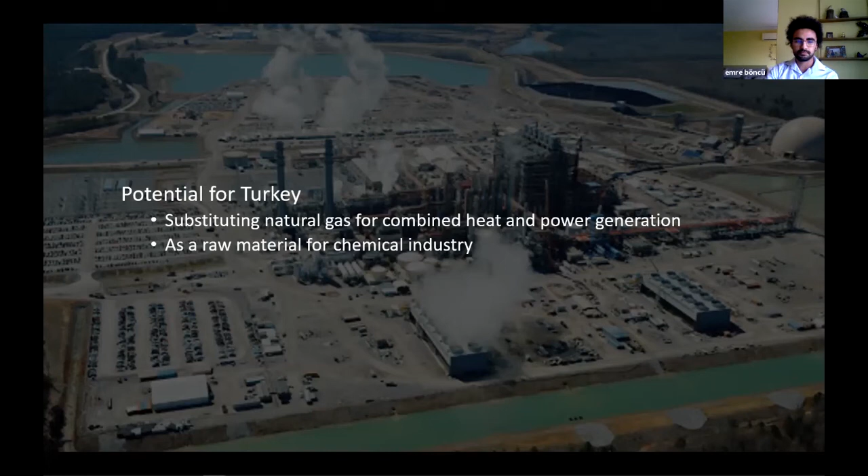In the picture, we see the Kemper County Integrated Gasification Combined Cycle Power Plant, which uses syngas gasified from lignite coal to produce electricity. Another significant advantage of syngas electricity generation is that this process is much more environmentally friendly than burning coal directly in conventional power plants. This advantage of syngas makes it valuable for countries other than Turkey as well. Syngas is eco-friendly because of its high hydrogen content and the fact that the carbon content of syngas can be lowered with processes after the gasification process.

Turkey started investing in gas turbines about 20 years ago. However, today a significant number of these turbines are offline due to changing energy policies. An example of these unused gas turbine power plants is the Aliağa EÜH combined cycle power plant, which our project focuses on as a technology demonstrator. Here we see a picture of the combined cycle power plant in İzmir Aliağa.

Here we see a picture of one of the gas turbines in Aliağa power plant. Gas turbines were installed in the Aliağa EÜH power plant 20 years ago, while Turkey was investing in this technology.

The turbines have been sitting inactive for many years because of their low efficiencies and because rising fuel prices have made them economically disadvantageous. This, combined with the fact that most of the fossil fuel consumed in Turkey is imported from other countries, shifted investments away from these technologies and caused many power plants like the one in Aliağa to go inactive.

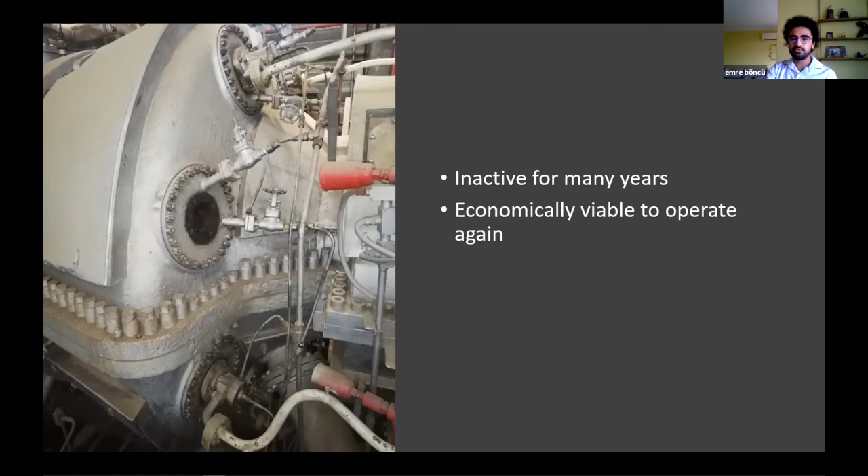This project aims to make these inactive power plants economically viable to operate again and reduce Turkey's fuel import spending. Here also we see a picture of one of the combustion chambers of the gas turbines in Aliağa. These combustion chambers are of the can-annular type and are designed to burn natural gas. Interestingly, these chambers were once modified to burn natural gas, while the previous combustion chambers were designed to burn gasoline.

The initial phase of the project involves acquiring gas turbine technology in Turkey. This is being done by converting existing gas turbine combustion chambers optimized for natural gas to burn syngas and its blends with natural gas. Arrangements with partners are made to use a typical gas turbine combustion chamber in this fuel conversion study.

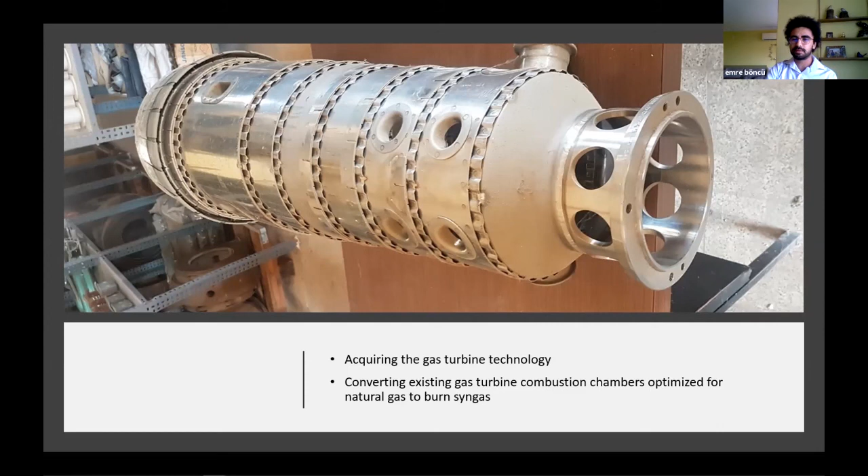This study additionally allows us to define the ideal syngas composition in terms of the H2/CO ratio for gas turbine burning, both as pure syngas and blended with natural gas at different proportions. This information is used to optimize the design of the lignite gasification reactors in order to approach this ideal syngas composition.

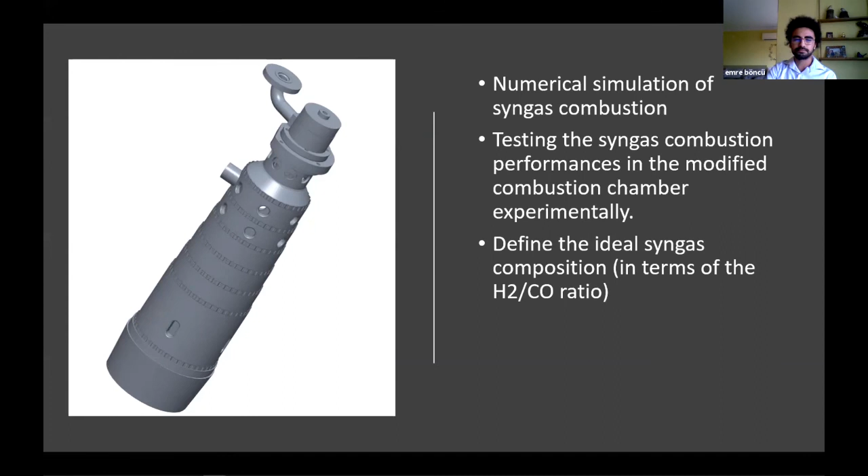For the experimental part of the project, progress is being made in two areas. Firstly, there is currently an experimental setup being constructed in TÜBİTAK SAGE to be used in this experiment. The experiment will involve high-pressure oxygenated flow through the combustion chamber to imitate the working conditions in a gas turbine. The gas will be heated via combustion prior to the combustion chamber being analyzed, and oxygen will be added to make the hot, high-pressure gas suitable for combustion.

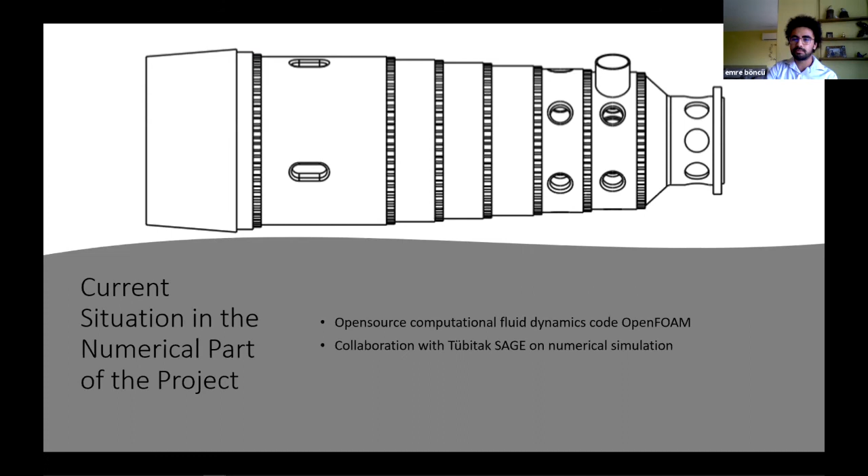The numerical part of the project is currently being developed. The open source computational fluid dynamics code OpenFOAM is being used for simulating the flames inside the modified combustion chamber. Another crucial development in the numerical part of the project is the collaboration with TÜBİTAK SAGE in the numerical studies. Thus, for experimental and numerical reasons, the combustion chambers are planned to be shipped from İzmir Aliağa to Ankara TÜBİTAK-SAGE facilities.

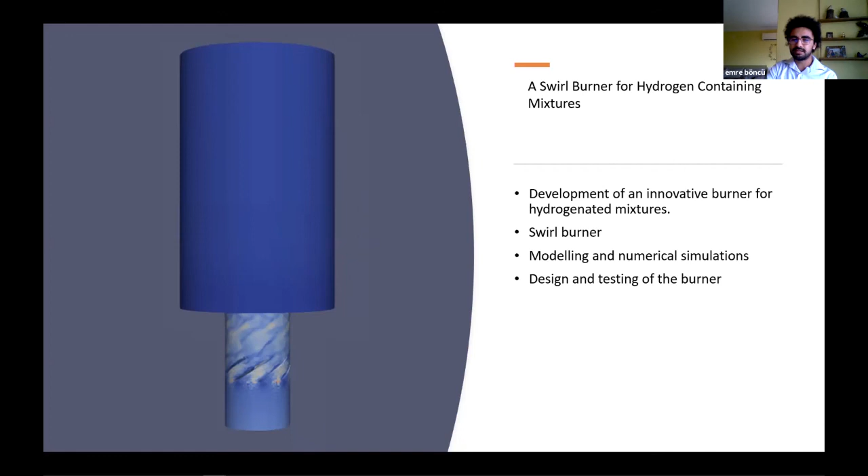Furthermore, the researchers in the project are advancing in the areas of pre-processing, processing, and post-processing to progress in both the experimental and numerical fields of study. An innovative swirl burner for hydrogen-containing mixtures is already being studied numerically and is planned to be studied experimentally in the new combustion lab.

This finally brings us to the new combustion lab planned to be built. Some parts of the mechanical engineering department of Middle East Technical University are being demolished to construct new laboratories for combustion experiments, such as the swirl burner I mentioned.